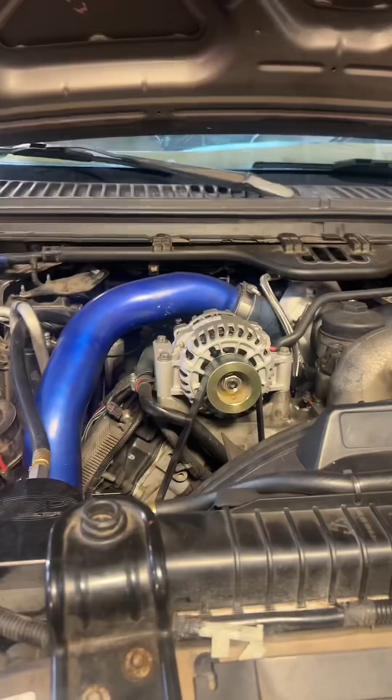This is my brother's 6.0 Power Stroke, and recently he put on the Smeding 64.5 drop-in non-VGT, and he's looking to get a little bit more power. So what we're going to do is take the injectors out and modify them up for some more fuel. This truck is also running my welded standpipe kit, so it's a good time to take them out and inspect them, see how they've been holding up.

So a lot of people don't understand how the oil rails work in a 6-liter. So this is the oil rail. These feed the top of the injectors, and right here is the standpipe, and this is the dummy plug. These are backwards compatible, so it can go on either side, so that's why they use a dummy plug.

Some common leaks that you can have is around the dummy plug, around this plug, around this plug, the standpipe, of course. Very rarely do I see these right here at the end. Sometimes we'll end up blowing the O-ring or coming loose. And super rare is it actually splitting this cast iron oil rail in half. I very rarely see that, but it does happen.

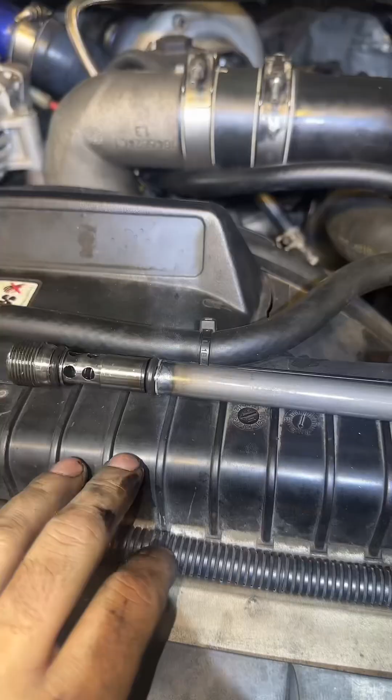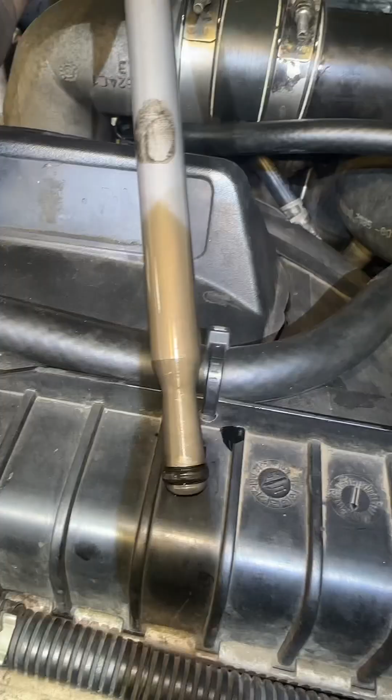So this is the welded standpipe. We just took it out of the truck and just overall inspecting it. All the O-rings look great. The bottom one looks great. So this has been holding up excellent. This set here has about 7,000 miles on it. And like you see right there, the bottom O-ring even looks good.

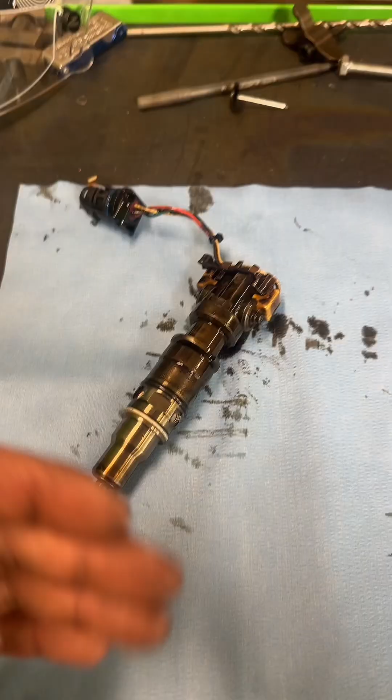So this is the stock 6.0 injector. We got it out of the truck. So now we got to break the body down. This is where this kit comes in handy.

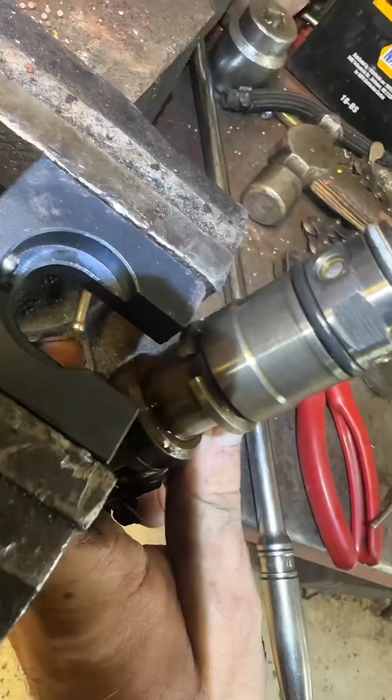So you just install the injector holder into your vise, 27mm socket, and then it sits the injector. You go into there, into that little notch, to that little pin, and that's what holds your injector. The injector broke down. We could take off the body here, just nice and carefully.

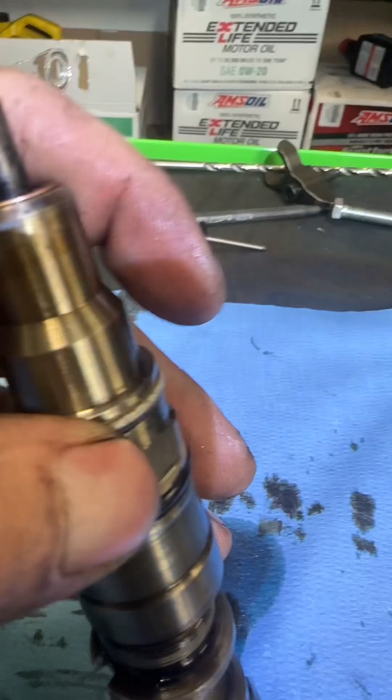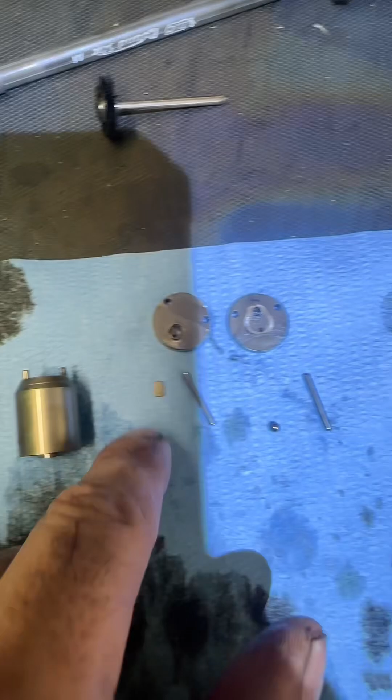So when taking apart your injector, there is a couple small parts that you got to watch out for. We got the little ball here. It's a check ball. That's what allows your fuel to come into the injector bore. And then this is your fire plate. The fire plate goes right here between this plate and that plate.

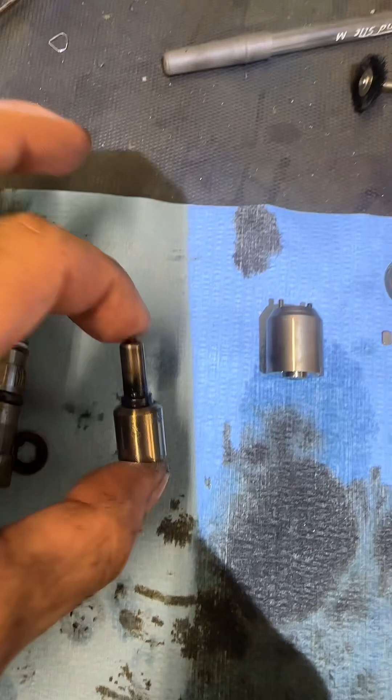What this does is when there's a fire event, exhaust gases tend to sometimes go through the nozzle up the injector, but then it'll hit this area here. This plate blocks off your hole here, and it doesn't allow exhaust gases to fill up the injector bore.

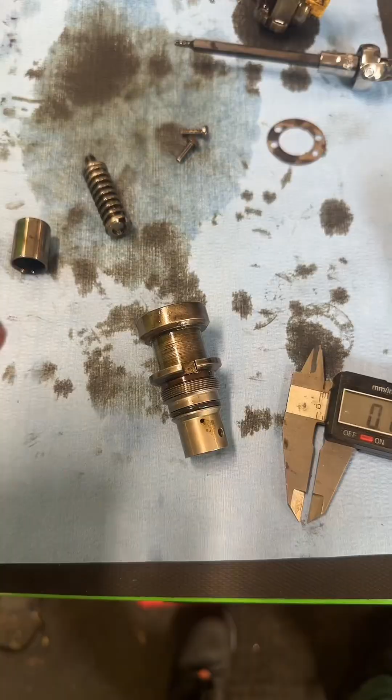So the first modification that we are going to do is blocking off the spill port. Blocking off the spill port will turn these injectors to around 155 cc. This is the spill port right here, and right before the injection cycle, the nozzle or the plunger is slightly above this. So it goes down, shoots out a little bit of fuel, and then it closes off, giving it a little bit of a split shot kind of design, so it gives a little bit of a fire and then gives the big fire. But we're going for some more performance. We don't need that, so we're going to block that right on off.

The size is 0.142, so we're going to build something to 0.150 and press fit it inside. That's where the Vevor lathe comes in handy. So we're taking just a bolt that I have and modifying it down. So we got our little plug made. So we're going to take it to the vise, put it in, and press it in nice and easy.

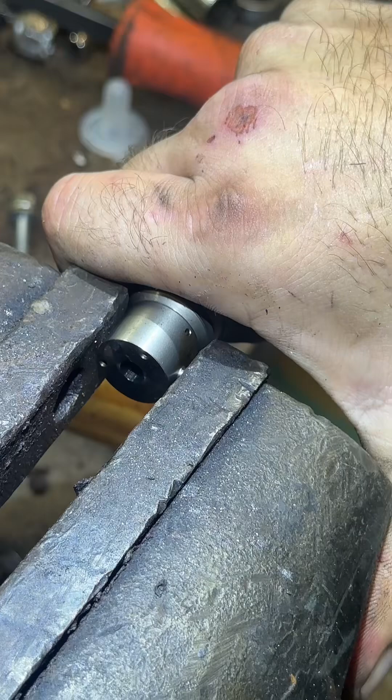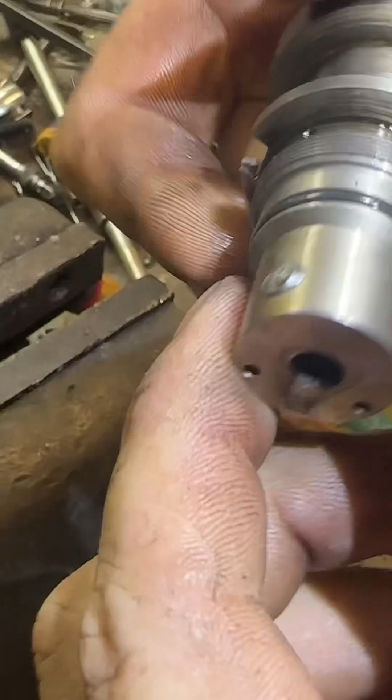There we go. She's pressed in. Ain't going nowhere. We'll grind that off, make it look nice and smooth. And just like that, you got yourself a nicely plugged spill port.

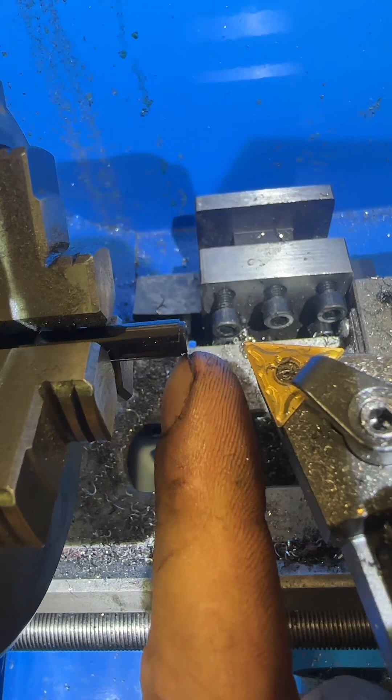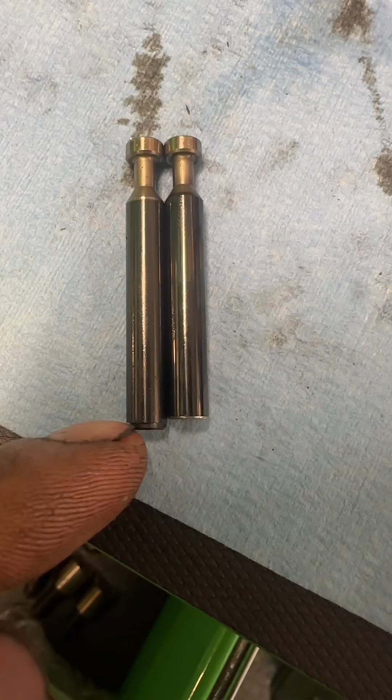The next thing we're going to modify is the plunger. Since we're going to 175 cc's, just cutting this little nipple right off here is going to give you right around that. And just like that, you have a modified plunger. I did get a little excessive on the cutting. Like I said, you usually just want to knock this nipple off, and that'll give you right around 175s. But we're going a hair bit extra. This is going to probably be more like 185s.

Now, after you modify the plunger, we have to modify the intensifier piston. So to get the measurement for that, I kind of like to put it in the vise and put it to full throttle and see where this plunger ends up sitting. As you can see, it doesn't sit anywhere close to the bottom here. So we're going to get our micrometer with the end piece and see how far in it sits.

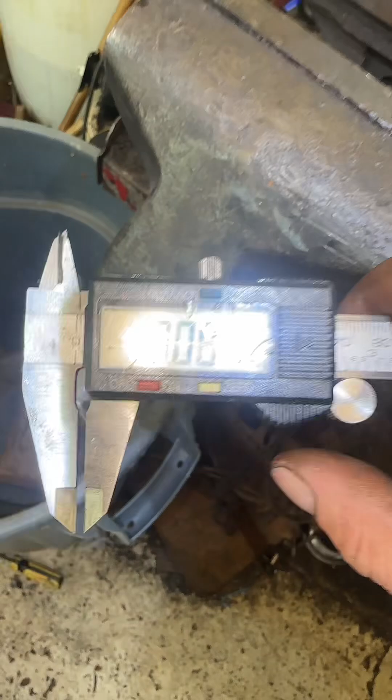0.708. Now, another thing that you've got to take into account is the top here, between this collet and the plunger. As you can see, it does have room to go up and down, but the intensifier piston does have a little nipple there. When it's all together, this floats. I forget the exact amount, let me get those measurements. But see, that moves up and down.

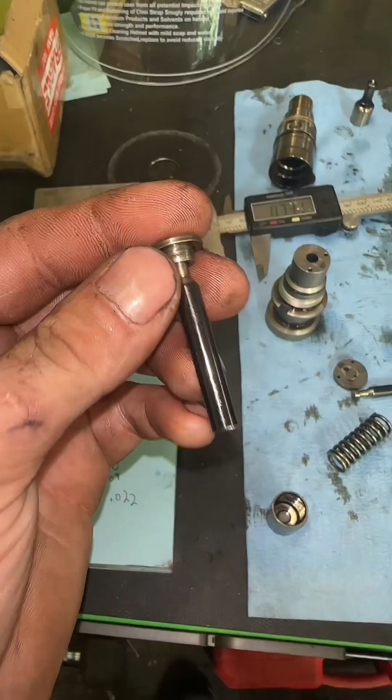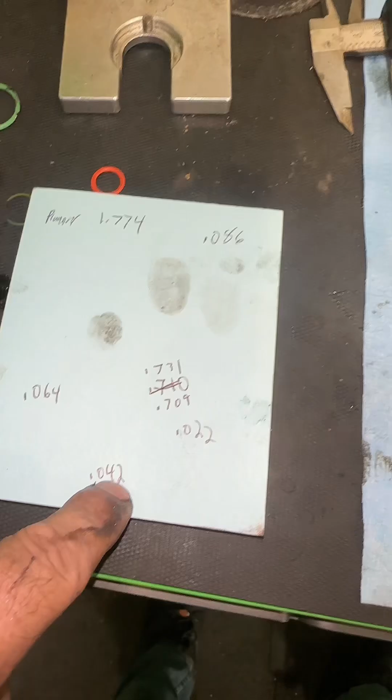So after some measuring, we got 0.042. That's the amount of play we've got between the top collet and the intensifier piston, basically the amount of free travel between the collet and that. So we've got to take that into account. The amount we want to take off the plunger is 0.086, but to account for that, we also count the 0.042, meaning we could take 0.044 off of the intensifier piston.

Now, we can make this a lot tighter and take off more of the intensifier piston if we modify this collet at the top, which is something I do. I tend to take off right until this little edge right here. See where that goes? I usually take off to about that, but I'll just take the 0.042 off so it has a nice fit into the piston and the spring and have about 0 thousandths of play.

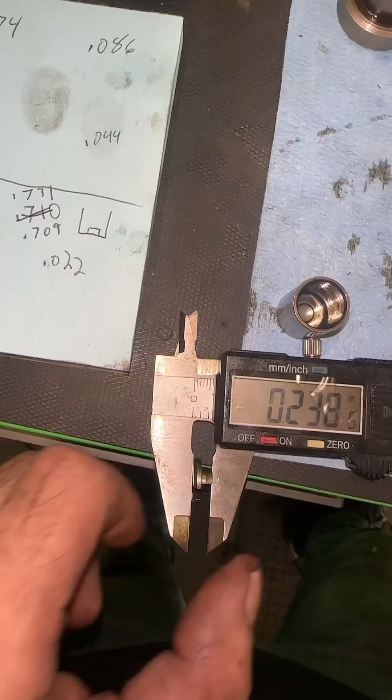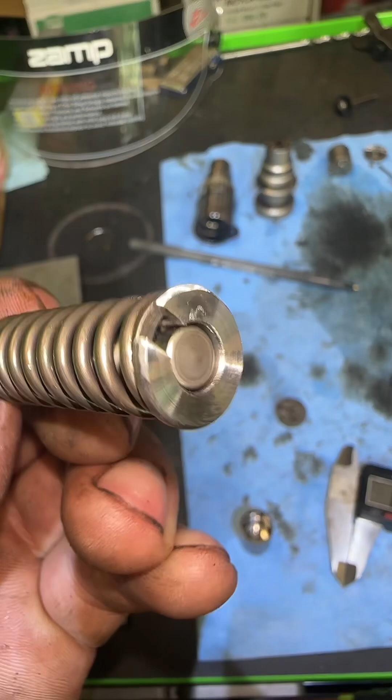So the goal for the collet: it's at 0.238 right now. We're going to go to about 0.196. So I modified it to 205, giving me about 9 thousandths worth of play. So we still get a little bit of play, which is good. And don't forget, when you modify the collet, you want to add a little chamfer to the edge right there. A little hand grinder, you don't need to be perfect. It'll do the job just fine. And on the inside as well.

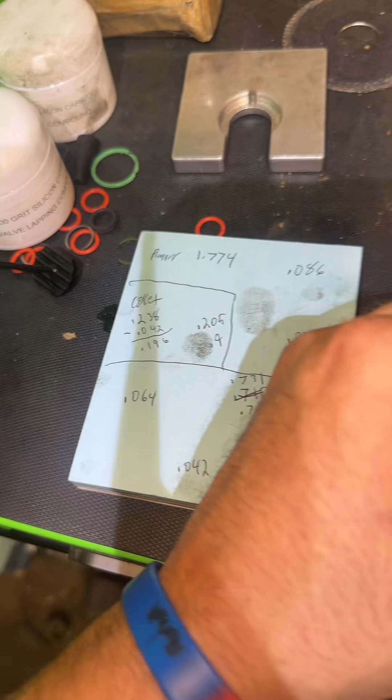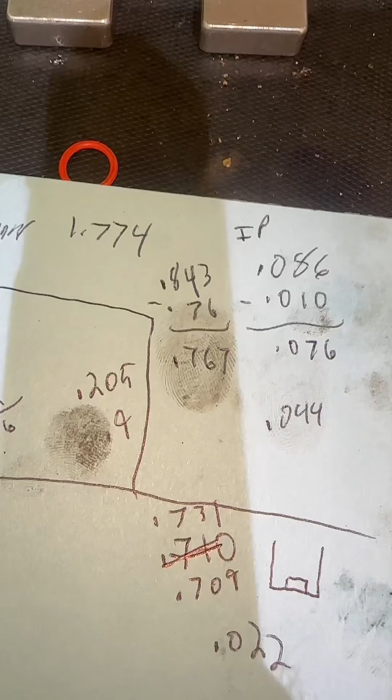And then once you put it all together, we have next to nothing in play. About 9 thousandths is what it should be. So we're going to do minus 10 thousandths off the 86 now, so we're going to take off about 76 thousandths. We're going for 0.767. So let's get that milled down. I have everything set where I wanted. All of my measurements are exactly where I want them.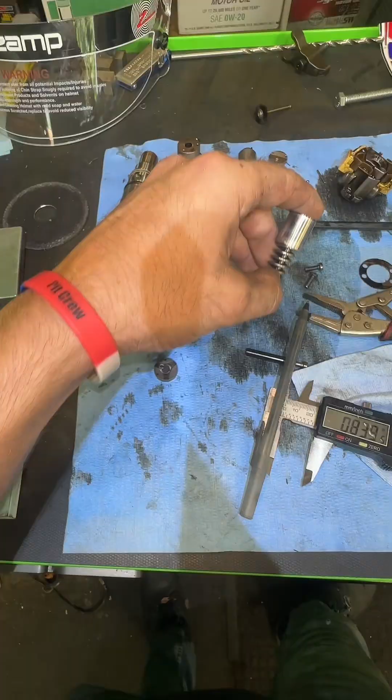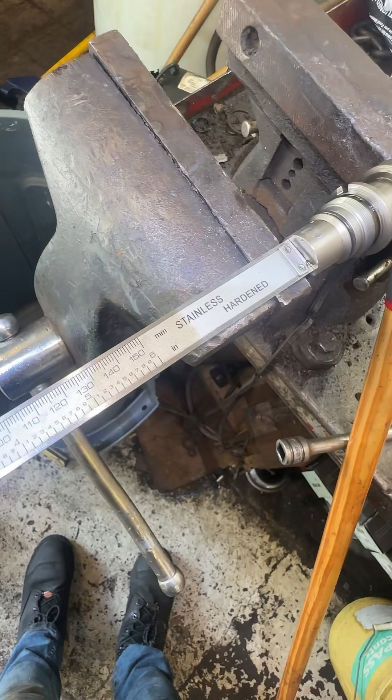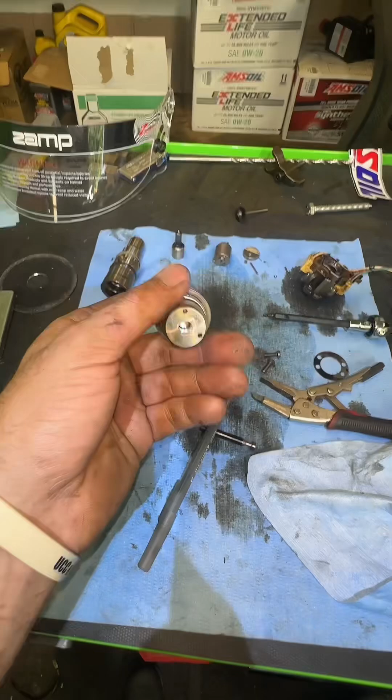So we're going to do another test and see how close this plunger is to the bottom. As you can see, we have it a lot closer. I'll open up my micrometer a little bit more, just so you know I'm not cheating. We go right on in, push it right up against, and we're right at 11 thousandths, 10 and a half. Exactly where I want it to be. So now let's put the top of the injector back together and calculate how much fuel this injector is now capable of.

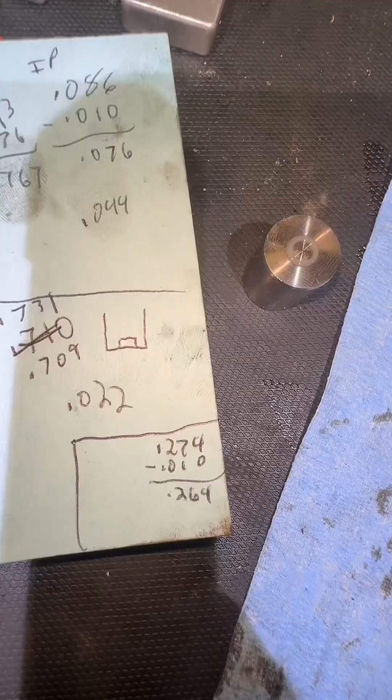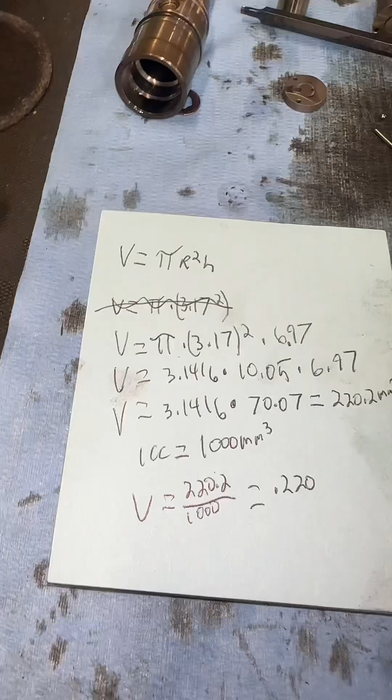Now that we've got the injector back together, you can see where the plunger sits all the way at the bottom. We know this only goes down to 10 thousandths from the bottom, so whatever number we get, we subtract that 10 thousandths. The number we got was 0.274 minus the 10 thousandths, so we have roughly 0.264 of travel. To make this calculation easier, we're going to convert to millimeters, because this uses a 6.34 millimeter bore. To figure out your volume, it's pi r squared times height.

And after all the calculations, Cam, you have 220 injectors now. Oh, rats. Oh, gee darn. I promised him I was only going to build 175s. I got a little carried away. So everything I just did isn't going to give you 175s, you're going to get 220s. Cam, how much fuel did you want? I was going for a daily driver. Not all of it, he said? All of it? No. Oh, yeah.

Yeah, so normally you just shave off that little nipple there, 30 thousandths off this. That's 175s. I got a little crazy. I was trying to go a little bit more so we can have it detuned to about 175s and a bit more even, because if you're trying to max out the injectors, you're limited by the fuel rate of each injector. If you go a little more, you can detune it and it's more even. So I'm going to get the rest of the injectors done, and when I come back, we'll have the truck running.

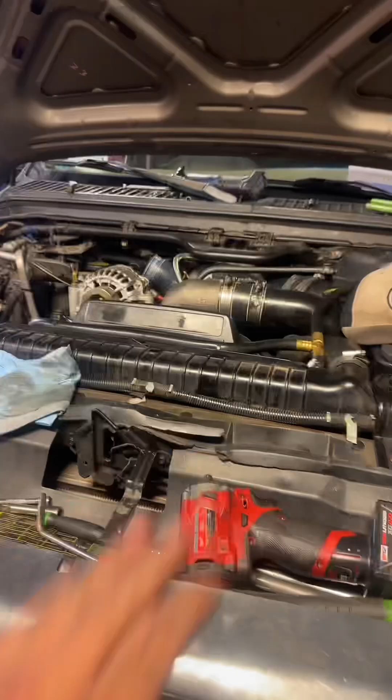So we have finished putting it all together. The injectors are all built to proper specifications. So I'll go ahead and start it up. You guys can hear how nicely this thing runs.

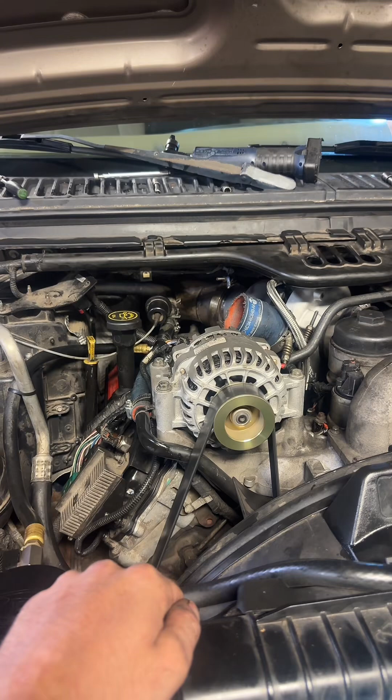Ah, that sounds beautiful. So I've successfully built another set of injectors. They're 220 cc's, but with stock nozzles. We're not tuning it for 220, only for about 175s. We're going to get that done, and I'll probably make some videos on that, because I'm running out of time here. Hope you guys enjoy. That's how you build injectors in your 6-liter.